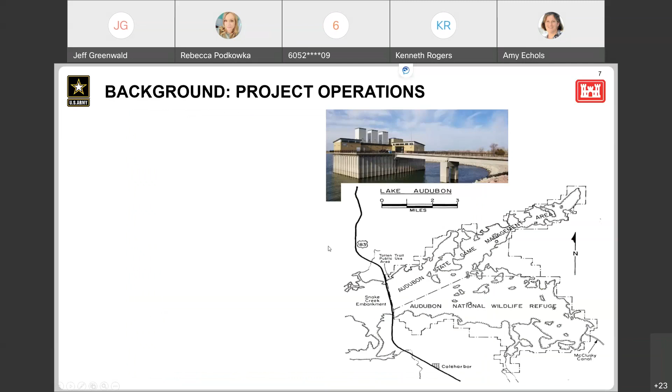The project itself was authorized, the Snake Creek Embankment was authorized to provide a relocation route for highway, railroad, and certain utilities to get across one side of the reservoir to the other. And then it was also authorized to serve as a sub-impoundment dam for water supply, wildlife, recreation, and diversion of water to eastern North Dakota.

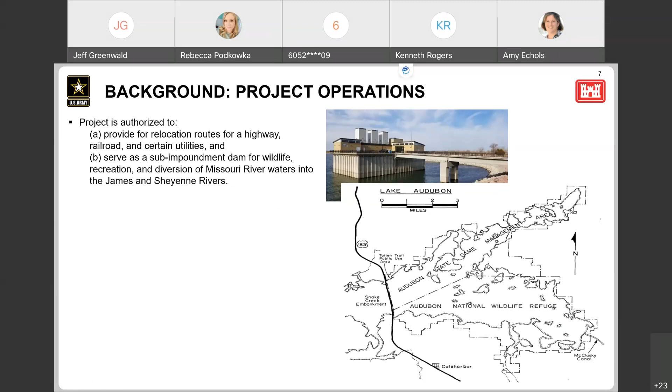The Corps of Engineers is the project owner. The project is operated in cooperation with the Bureau of Reclamation, the Garrison Diversion Conservancy District, the U.S. Fish and Wildlife Service, and the North Dakota Game and Fish Department.

The Bureau of Rec and the Garrison Diversion Conservancy District operate the Snake Creek pumping plant, and that's what's in this picture here. That plant diverts water from Lake Sakakawea to Lake Audubon. And the idea there is to keep Lake Audubon at a fairly constant level so that it can supply water to the McClusky Canal and also meet those environmental purposes. You can see on this graphic here in the bottom right, the canal is labeled.

The Fish and Wildlife Service manages the Audubon National Wildlife Refuge, which is shown here. The North Dakota Game and Fish manages the state game management area, which is also shown. And the Corps of Engineers' responsibility is really to maintain the integrity of the embankment.

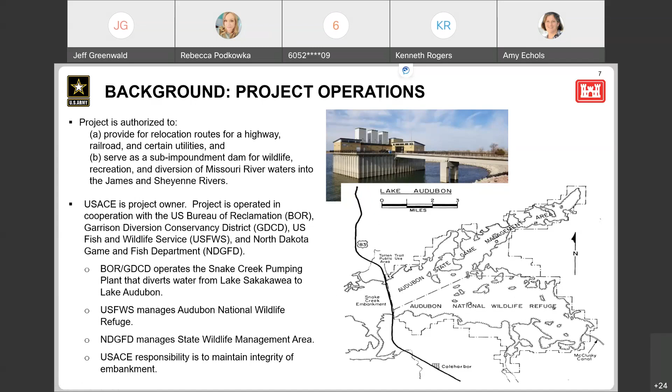There is a dam safety concern that's been identified by the Omaha District at Snake Creek Embankment. It was identified between 2000 and 2009 during a drought when the differential between the two lakes reached approximately 41 feet. During the drought, the difference in water levels between Lake Sakakawea and Lake Audubon did pass historical records, because we keep Lake Audubon artificially high, and we were in a drought, so Lake Sakakawea fell. What the Corps did at the time is we increased our monitoring and surveillance while the Lake Sakakawea levels were low, and we identified dam safety concerns.

We did implement some temporary measures to manage those concerns at the time. We put in a pool restriction. We added some relief wells and some other dam safety equipment, some piezometers. But really, those things expired. They were temporary measures to manage the risk.

After that drought, we did do a seepage analysis and made a determination that there's a potential for adverse under-seepage conditions that could lead to failure of Snake Creek Embankment when the pool differentials exceed 43 feet. In response to that, in 2019, the Lake Audubon Water Control Manual was updated to implement a pool restriction of no greater than 43 feet between Lake Sakakawea and Lake Audubon.

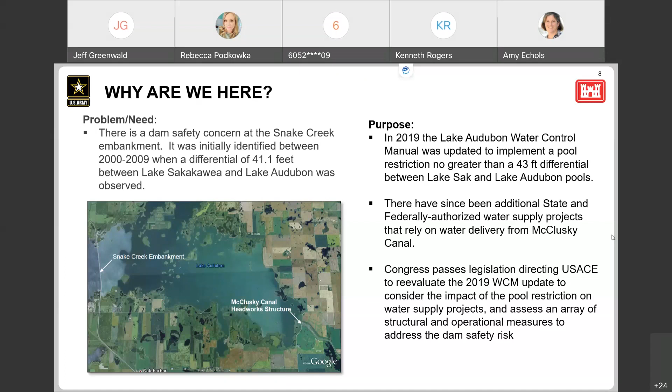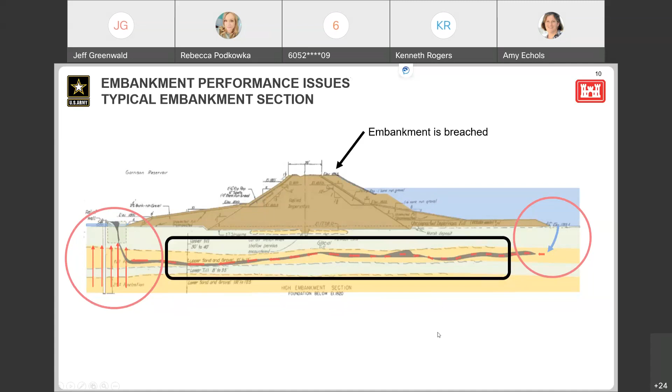Just realized my video was off. I'm going to turn that on.

And we have collected some new data. The Corps uses a variety of data to conduct its risk assessments. So we've collected some geotechnical borings last fall to help inform this, and we also collected some bathymetry and other elevation data to help inform our risk assessments.

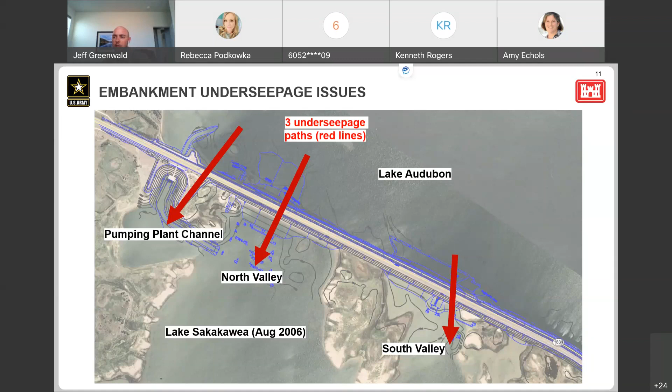Now I'm going to talk a little bit about the consequences of an embankment failure. In a dam safety modification study, we always consider what the consequences of a dam failure would be, and it's an important part of how we estimate risk.

So I will just quickly define risk, since we're using that term a lot. It's the accepted way of understanding it in the emergency management and dam safety profession. Risk is a function of probability of failure and consequences of failure. Probability of failure refers to the likelihood of a dam failure, and failure refers to an uncontrolled release of water. The consequences of failure are the effects that a failure would have on the public, property, and or the environment.

The life safety consequences - we feel it's very unlikely that there would be life safety consequences at this project. The embankment failure itself would likely be slow to develop. The population at risk consists of individuals using the embankment to get from one side to the other, and the in-water folks that would potentially be in the water near the location of a breach. So again, from a life safety perspective, we feel this is a safe project, and it's unlikely there would be life safety consequences.

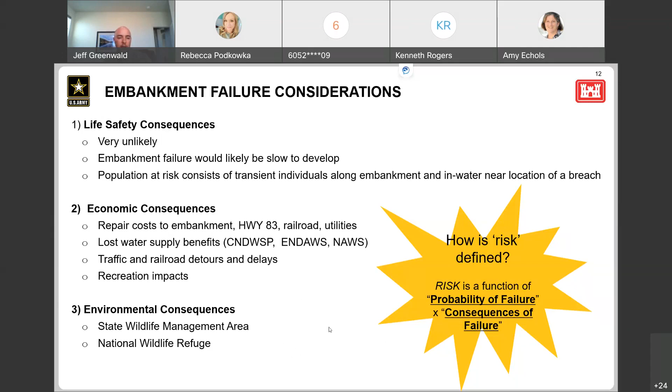Now I'll talk a little bit about constraints. These are things we develop within our study process that we cannot violate. A lot of times we don't list these out, since it's implied that we're just going to follow the law and regulations. But because we have specific legislation for this study that was recently passed, we are listing it out as a specific thing we're following.

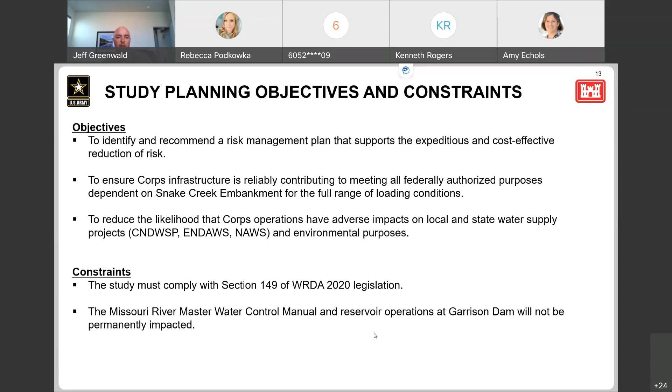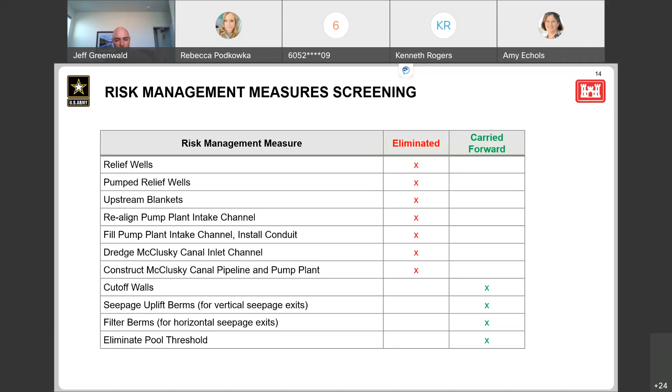So the 4 measures that we carried forward were cutoff walls, seepage uplift berms, filter berms - those are all structural things we would build - and the 4th one is elimination of the pool threshold. These are the measures we carried forward to combine into alternatives shown on this slide.

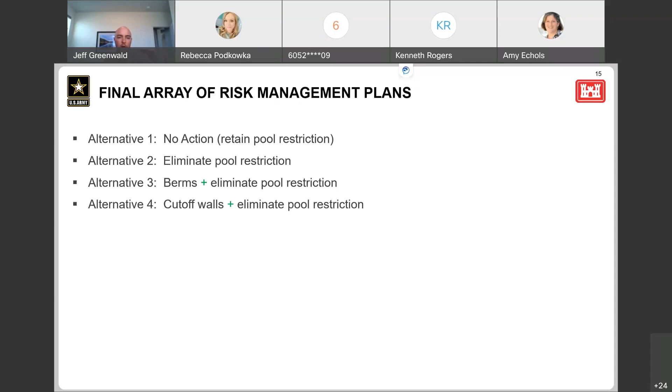I'm going to talk a little bit about each one of these. Alternative 1 is the no action scenario, which as I said is an important scenario used as the basis of comparison for the alternatives. In this study, for no action, we assumed that the 2019 Water Control Manual pool restriction would remain in place.

If the pool differential reaches 43 feet, then lowering of Lake Audubon is possible. Based on preliminary analysis, we're showing approximately a 1 in 18 chance each year, about 5.5%, that Lake Audubon pool is lowered in accordance with the existing pool restriction. The lowering of the pool has potential to impact state and federal projects that are authorized to provide water to the canal, state and federal wildlife areas, and there are also recreation impacts associated with this alternative.

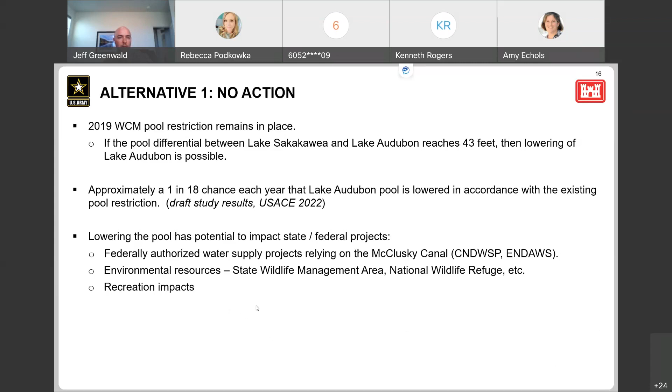The second alternative is elimination of the pool restriction. This would eliminate the existing pool restriction. In order for us to select this alternative, our risk assessment results would have to indicate that the risk of embankment failure is low enough that a pool restriction is not necessary. We've collected new data, including soil borings and elevation and bathymetry data, to help evaluate this alternative.

If we were to select it, we would follow our process for changing the water control manual. Lastly on this one, it would not eliminate the risk of the unknown. There's always a chance you could get a significant rainfall event, like 10 inches of rain, that would slough the embankment, for example, and that could cause us to take emergency measures. So I just want to point that out - it would not eliminate risk of the unknown.

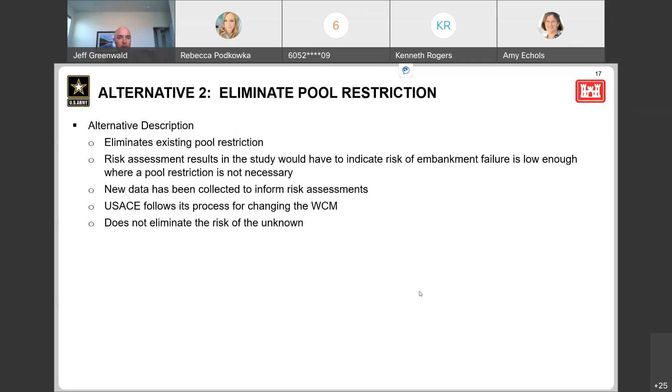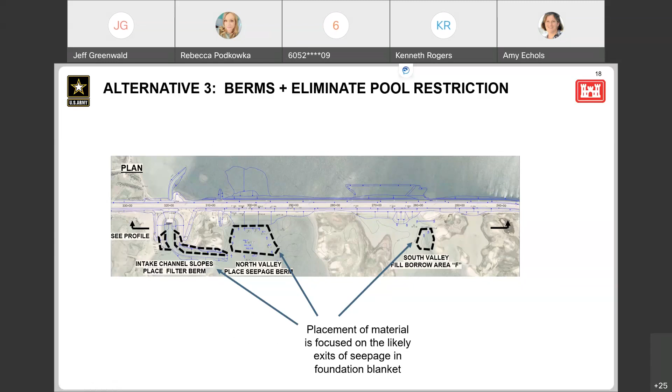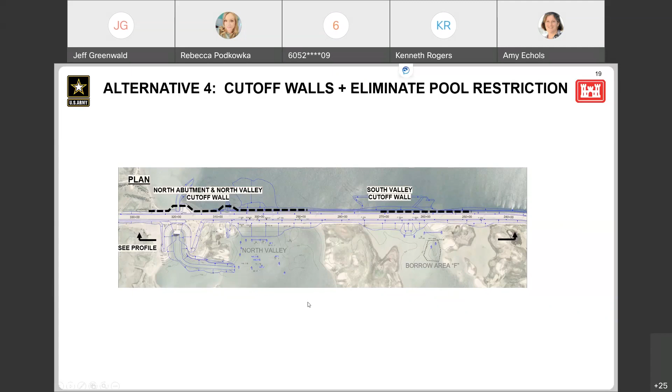Alternative 4 is cutoff walls and elimination of the pool restriction. The idea here is to construct vertical cutoff walls on the Lake Audubon side, intended to block seepage paths underneath the embankment. It's the same thing I showed earlier - we've got those three red lines, one going into the intake channel, one in the North Valley, one in the South Valley. The cutoff walls would be intended to block seepage under the embankment.

So that's an overview of our alternatives, and we're getting close to the end of the presentation. As we get to the public comment portion, I'd like you to think about what considerations are important to you as we evaluate the impacts of the final array of risk management plans. These are: no action, eliminate pool restriction, berms plus eliminate pool restriction, and cutoff walls plus eliminate pool restriction. Examples of things you might consider that would be helpful in our evaluation are life safety issues, water supply issues, climate change issues, recreational uses, open space access, biological and cultural resource effects, and property protection.

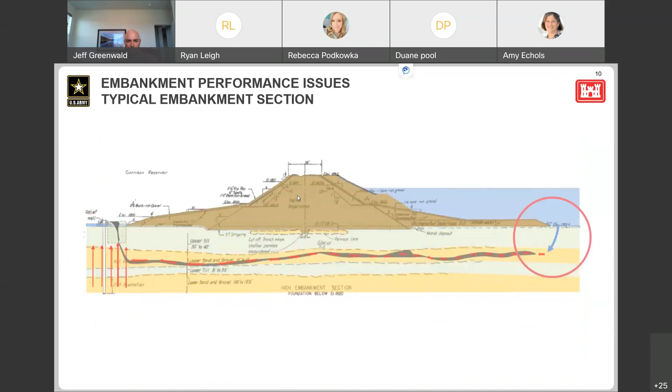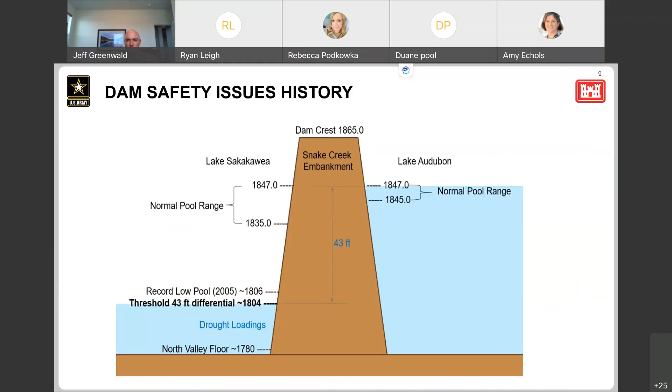Okay, the other one, okay. Sorry, my next question was with relation to building the berms. Would impacts to current design or other infrastructure being designed and built, like the NAWS intake, be considered in or interrupt the building of those berms?

So I think I can answer. Okay, yeah go ahead Ryan. I think we could both answer it, but you could probably answer it better. Go ahead. Yes, we're aware of the incoming NAWS intake, anticipating that to be built in the next few years, and absolutely we're considering that in these designs.

So, okay, and then my third thing is more a statement than a question, and that's with respect to, I'm assuming there's some economic impact analysis that will be preceding a benefit cost analysis as this project moves forward, and I would be interested in following along on that process, understanding what you're developing and the methodologies being applied. Thank you.